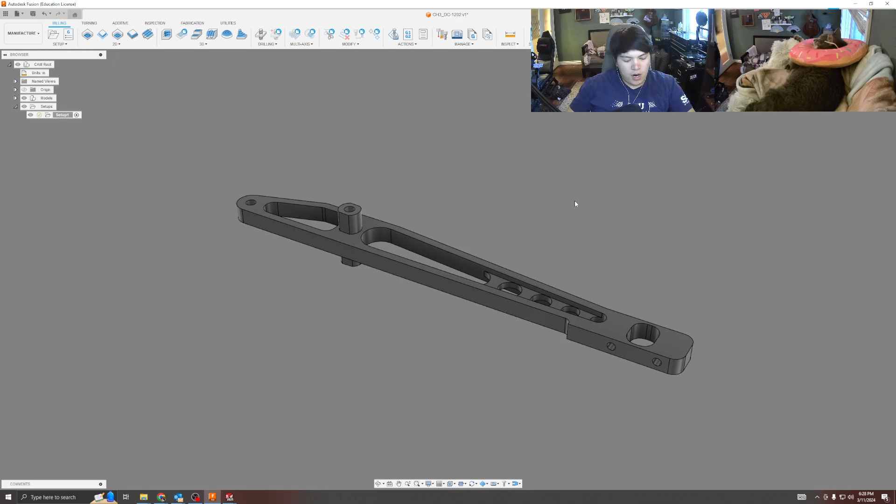Okie dokie. So this is the third part of the 6-part series. We're going to be introducing you to general operations and the tool table. So let's start off with the tool table.

You can see here that in the cloud, which is what you guys are gonna be using, somebody will set up the new tool table. By the time you're viewing this video, you probably won't be referring to this. You'll have the new Haas mill, and with the new Haas mill, we only have so many things that we can use. But luckily for you guys, there should be an updated table that somebody else already made. But generally speaking, this is the actual tool table itself for your parts.

So this will go ahead and list all the tools that you've used. So right now, I'm not actually using this tool, tool 11, 1/2-inch roughing end mill. I'm not using this tool. So say you have a bunch of tools that are populated, and maybe you did an operation and figured out, oh shoot, I actually don't really need to use that tool. It'll still show up here.

So in order to clean your tool table, you just click this little sweeper at the top, and you remove basically all the unused tools, and that'll just make it really nice and organized. So that way, whenever you reference this tool table, say you're making your tool list, you're prepping your tools for the mill, you have a nice clean tool table that you can reference.

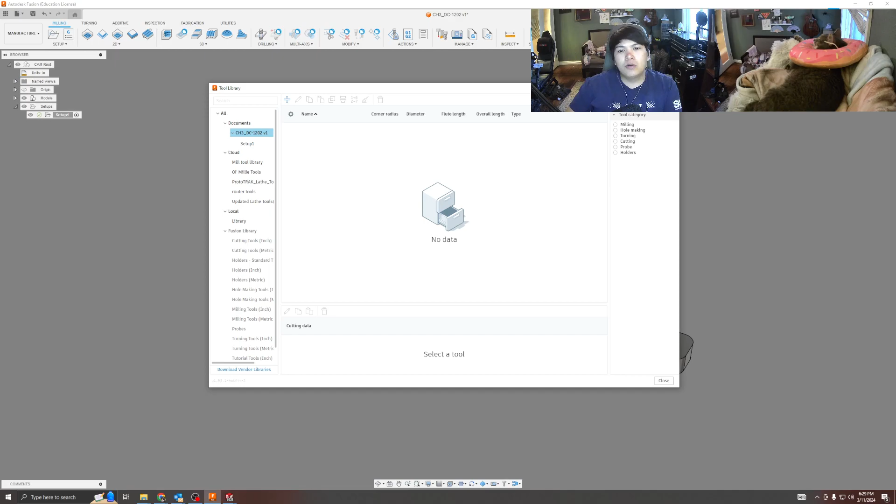Okay, so that's pretty much it for the tool table. I'm not gonna go into the organization of it and all that, but I will hit a couple of key points actually. So we have, generally speaking, our end mills. We have end mills and we have drills, and then we have a few specialty tools, like chamfer tool and engraver tool. You have face mills, like the fly cutter, the dodeca.

But within the end mills, we have a couple categories. So we got our flat end mills, both for finishing and roughing. Finishing is for taking off small layers, possibly even bigger layers if you don't have a roughing end mill. Your roughing end mill is what you're going to be using most of the time.

It basically has teeth, and that allows it to make partial tool engagement, allowing you to take a larger depth of cut when controlling it. And you control that with optimal load within adaptive clearing. I'll show you that in a little bit.

You have bullnose end mills. Bullnose end mills are really solid if you design a part and you need just tiny little fillets. It's basically a flat end mill with tiny little radiuses. Sometimes those radiuses are so small that if you look at the actual end mill itself, you might actually confuse it for a flat end mill. I've definitely done that, but generally speaking, if you do that, it's really no harm, no foul. If you have any sharp corners and you hit it with that, you're just reducing the stress concentrations that you have in your component.

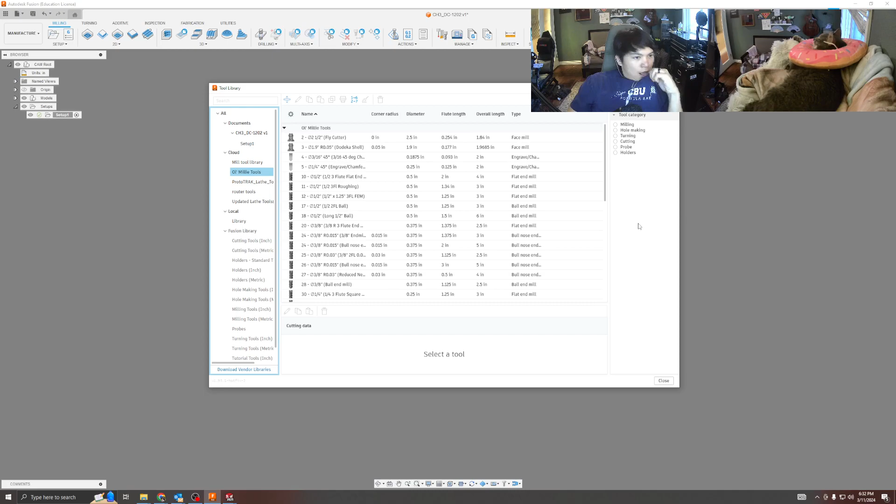Okay, I think that's it for tools. So let's go ahead and talk about operations. So there's a couple different sections. There's 2D and there's 3D. If you find yourself using some operations more than others, for instance, say I like to use this flat one a lot, which I never actually like to use, you can actually pin this to the toolbar to ensure that you have better access. But you know what? I don't really use flat that much.

I'm going to take that off the toolbar. Yeah. Okay. So you have 2D and 3D. You kind of know how to pin stuff up here, which is cool and really useful. But let's go ahead and talk about 2D versus 3D.

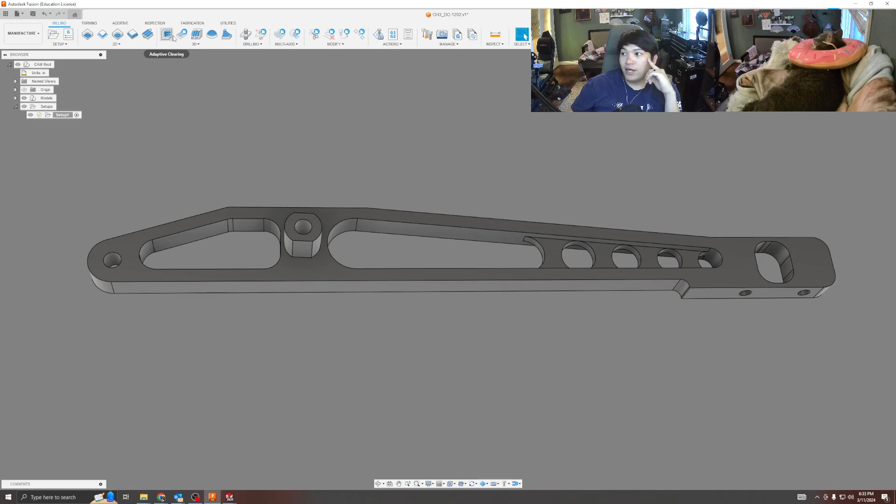2D you typically want to do if you want to control your end mill to a specific area, if you have sketches that you're using to define the area that you're machining, all that stuff. But I don't really use 2Ds that much anymore. Really, the bread and butter of what we do is adaptive clears. Adaptive clears are super useful. It does all the work for you.

And there's a couple constraints about it, but generally speaking, you just let it rip. You have to change a few parameters, but it's pretty automated, which is really nice. So breaking this down, 2D and 3D aside, and disregarding drilling, you have two primary tool paths, two operations, that you're going to be using: roughing passes and finishing passes.

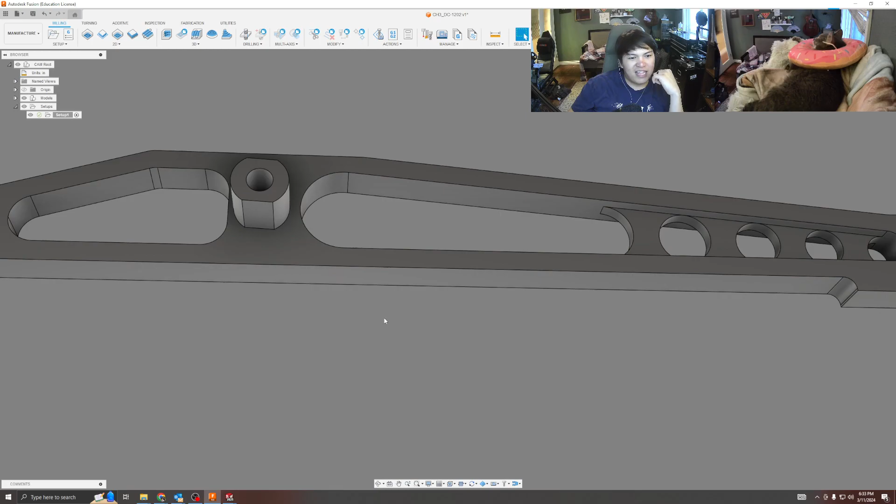So if you're new to machining, roughing passes are tool paths that go extremely fast. Extreme is a rough way to put it, but they're fast tool paths that remove as much material as possible. They leave a small layer of stock, and once we get the component down to almost net form, we come in with our finishing passes that go nice and slow and leave a beautiful surface finish. That way we have a nice looking part that is up to the spec we designed it for.

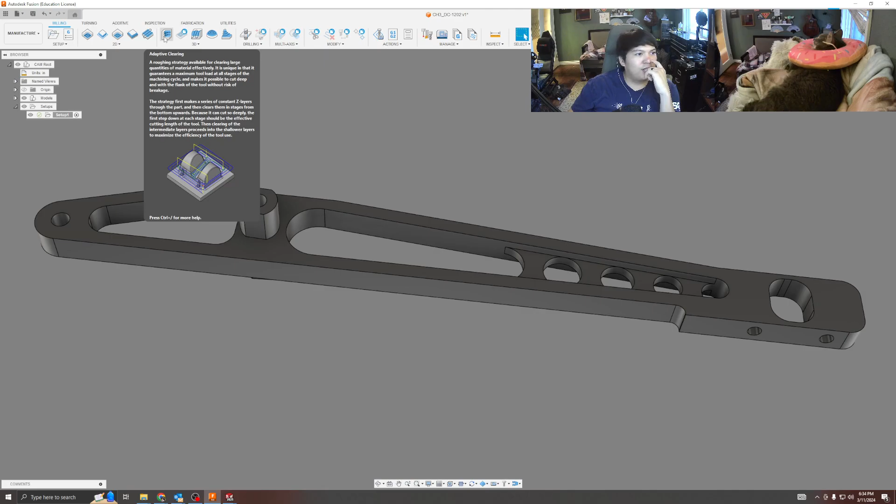Typically, roughing passes, actually really all roughing passes, you're going to be using adaptive clears. And then for finishing passes, we have two areas that we want to finish. We have finishing in the axial areas. When I say axial, I mean these flat faces. Looking at the origin, we're looking down at the part right here. You're probably going to be looking at the part like this when it's in the vise, from an ISO view.

But you have your axial finishes and your radial finishes. Radial is basically wherever the side of the tool touches, and axial is where the bottom of the tool touches. So whenever I refer to that, just remember that's what it means. So we have two different surface types. With our radial surfaces, we're going to be using contours typically, and for our axial surfaces, we're going to be using pocket.

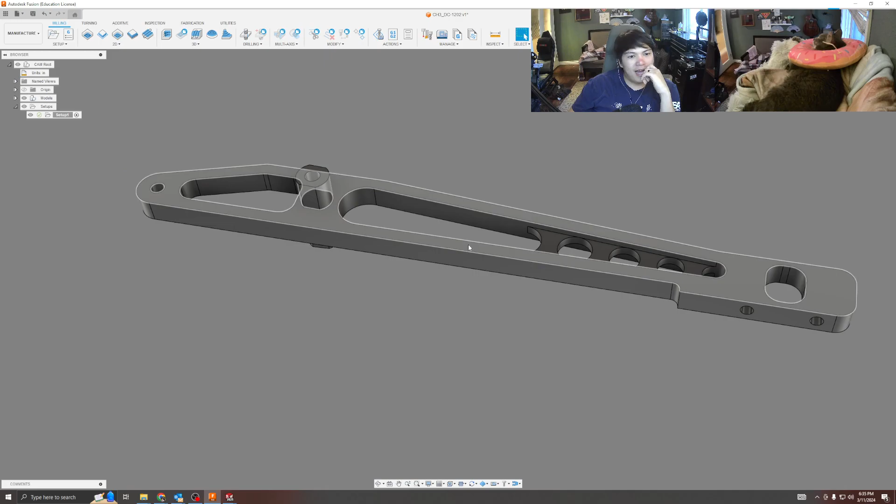Now the advantage of the roughing pass is of course that it's faster, but there are some concerns, especially when we're talking about the roughing end mill. So let's go ahead and do our first thing. We're going to use the 1/2" end mill. You guys will most likely have a new tool library. So we're going to click OK. And now something's going to come up, and I'm going to point that out to you right now.

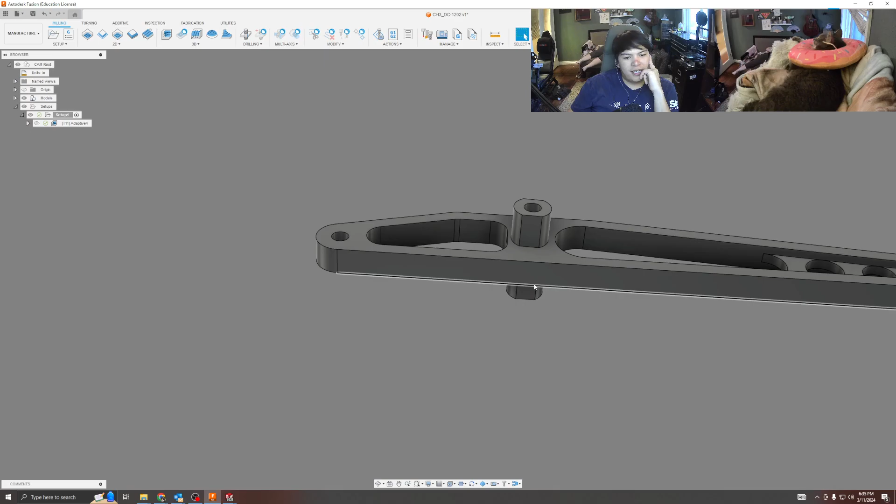What's happening in this adaptive clear is that it's going pretty much all the way to the bottom, finishing this all the way to here, which is fine sometimes. But here's the concern. This part is in the vise, and if we look at the setup, it's going to be clamped below this line. If we actually run that adaptive, it'll hit the vise itself, which is not good. That is no bueno.

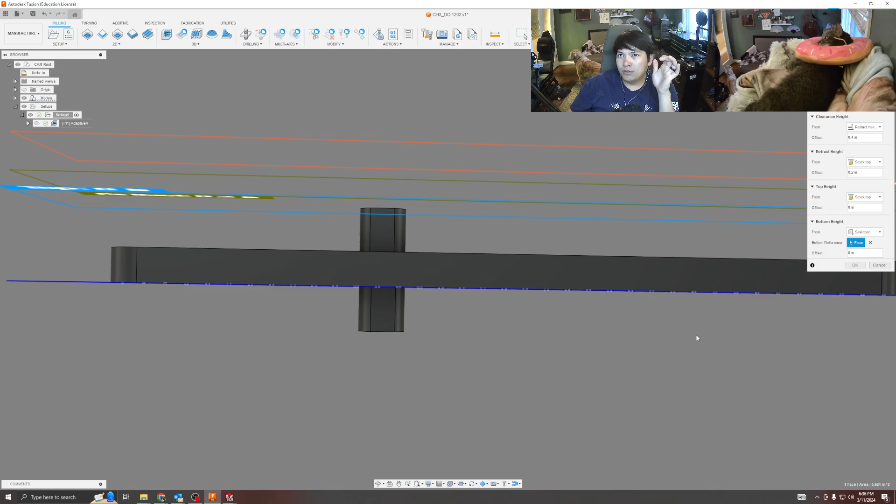So how we control where our adaptives go is we go to heights, and then we change our selection to here. If you're using the second to last parallels with the 6" vise that we have now, it's gripping about 250 thou. So generally speaking, I always want to make sure that I have about 300 thou of clearance. So if we simulate that, that's awesome, but there still is another problem.

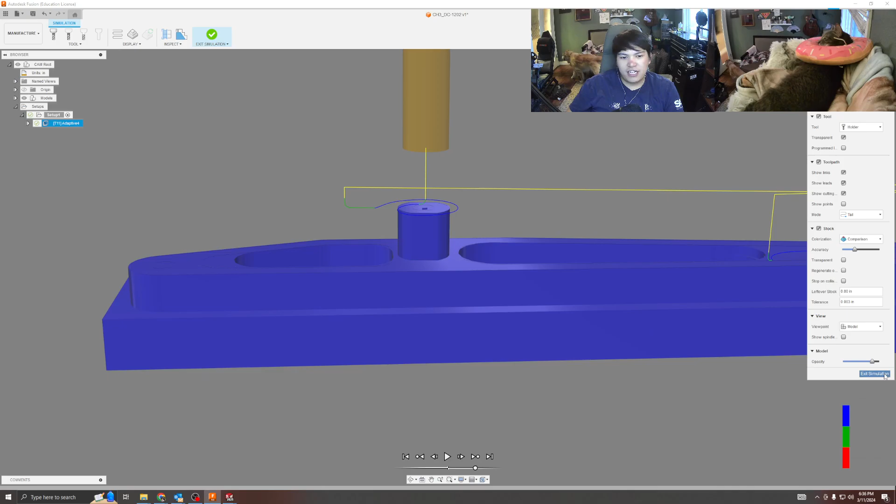Because I have stock to leave and I changed my bottom height to the very bottom of this part, it's not actually exposing it to this line. It's exposing it a little bit above it. If you go to passes under the adaptive settings, you see that I have an axial stock to leave of 5 thou. So there's a layer that's 5 thou above this bottom section.

So in order to fix that, I'm just going to come here and change this offset. Let's go 50 thou. That should be more than enough, especially if you measured your Z really accurately. A lot of the times you can't get your X and Y with calipers, but you can get your Z. We don't have ridiculously tall pieces of stock.

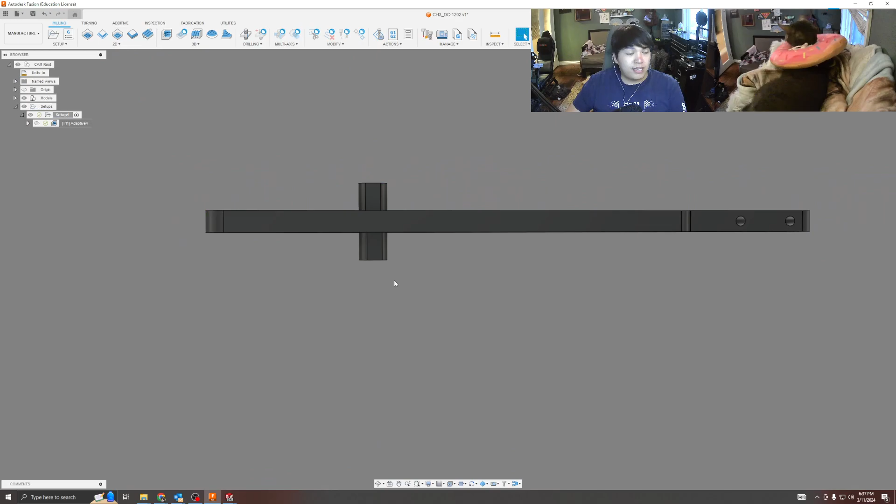Now that that's machined, a quick trick that I want to show you that I've been using for a long time is, in order to do a sanity check, and I know, obviously looking at this, I know that this is more than 250 thou of clearance, or sorry, 250 thou, which is the amount the vise is grabbing if you're using the second to last parallels, but I want at least 300 thou of clearance. So

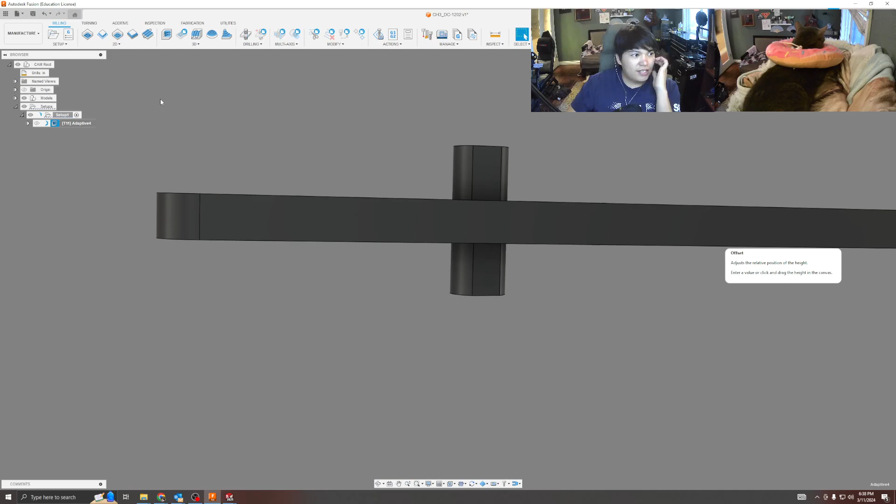A sanity check that you can do is be like, okay, well, I saw where that stopped, and in order to meet my minimum clearance requirements, I can actually change this to stock bottom, and then I could change this to 300 thou. And so this, I know for sure, will clear my vise as long as you measure your stock correctly in the Z. I know that this will clear my vise, and this is really useful to sanity check yourself if you have particularly a really short piece of stock in the Z direction.

But that's not really needed here, so I'm going to go back and change the heights to model bottom with an offset of -50 thou. Oops, not model bottom. I was capping, selection, that guy. Yeah, with an offset of -50 thou.

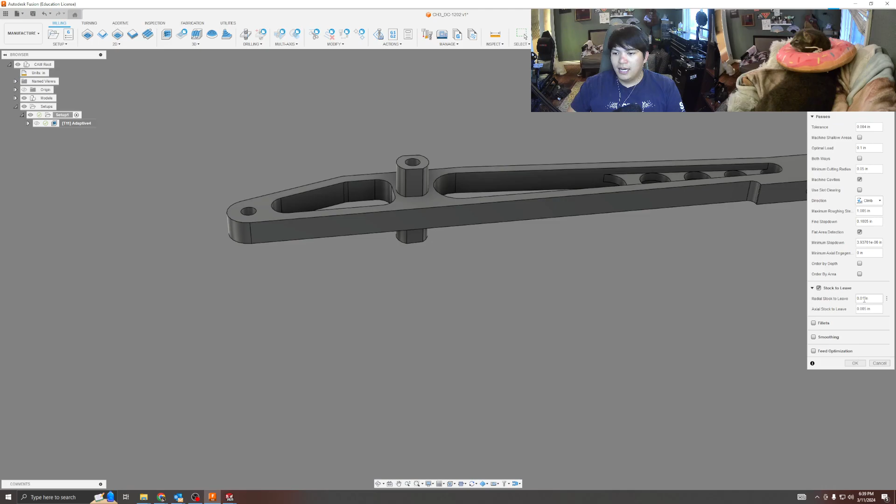Boom. Okay. So with the roughing end mill, this is super important, specifically with the roughing end mill, just because of the surface finish it leaves. For the radial stock to leave, and this might change if the roughing end mill is 1 inch in diameter, but this is what it is for now, you want about 10 thou, and then the axial stock to leave 5 thou. So we'll call it good.

The last thing to cover with the adaptive is your optimal load. Now, what makes the adaptive clear different from pretty much all the other stuff is that you actually have this parameter, optimal load. If you want, you can go ahead and pull it up yourself on Fusion. You could read what it does, but it really controls the amount of tool engagement that you have in the entirety of the tool path.

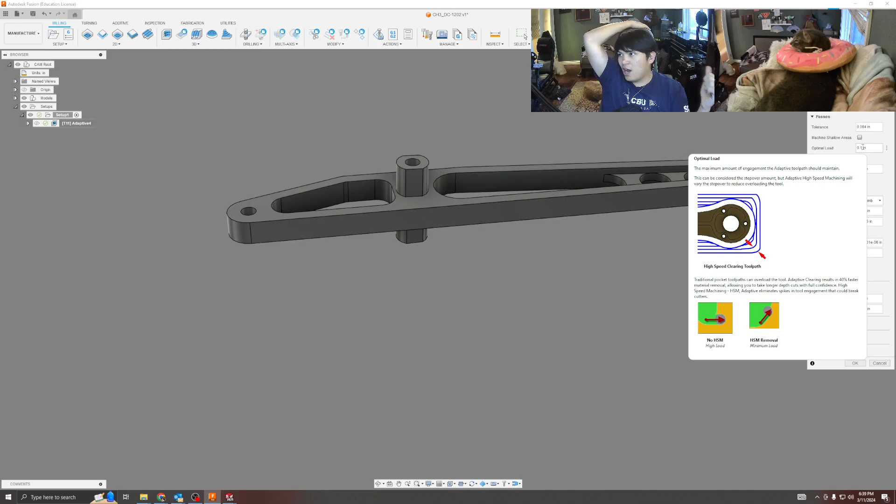Now there's kind of pseudo ways that you can do this with like contours or something by adjusting the stepover. But really, this is the most reliable way to control your tool engagement when you're hogging away a ton of material. So the advantage of the roughing end mill is that we can go up in optimal load.

A good practice to think about optimal load is you get the tool's diameter and you get 25% of that tool's diameter. For instance, say this was a 1/4 inch end mill. Okay, 1/4 inch end mill. 0.25, and then we get 25% of that, 0.25. That equals 0.0625. So we can change our optimal load to 0.0625.

And that's going to be generally kind of conservative. It's a pretty good middle ground for your optimal load. Not too little, not too much. And you don't want to be on the super conservative end when you're doing this stuff, because it will increase your machining time by a good margin. So that's the last thing to cover over adaptives.

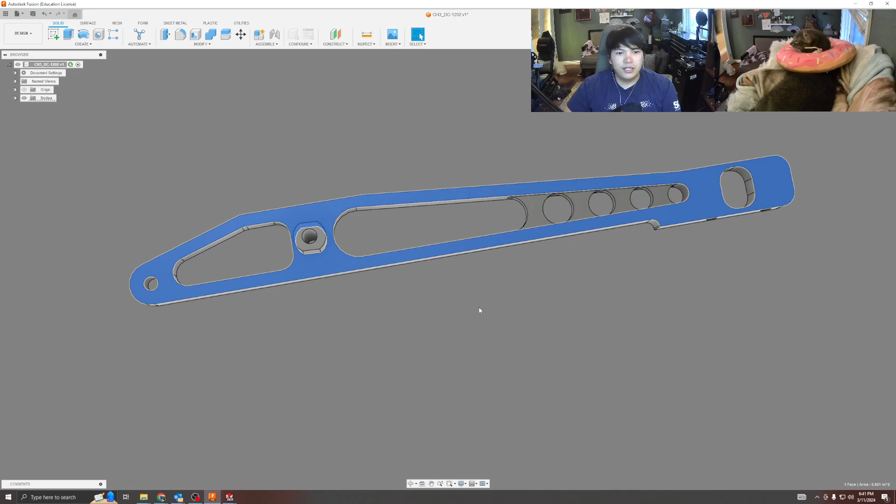Machining boundaries and stuff, you guys won't really need that until you get more advanced, depending on your part. And if there is a part, hopefully your lead can explain to you how to control machining boundaries. But I typically do it with sketches. You go to design, you do a sketch, and then you have a box. And then with that box, let's just pretend that I did a sketch. Actually, you know, I got it.

So let's go over to this guy. I think, yeah, this guy. So you'll notice that, let's look at this adaptive. Ooh, no, that's not a good example. Maybe this might not have been a good example. Yeah, I was capping. This ain't a good example. Whatever. Machining boundaries, good for making sure that you avoid the vise.

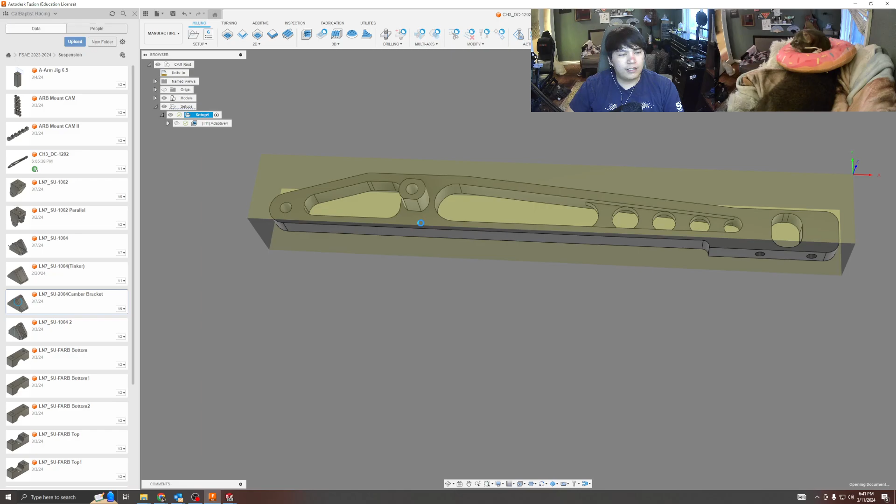Wait, let's, for the sake of time. Okay, cool. This one looks solid. Okay. So I'm gonna go ahead and simulate this. And now when looking at this part, oh shoot, this one might kind of suck too. Here, let's check this. Models, bodies. I'm just here to control my bodies.

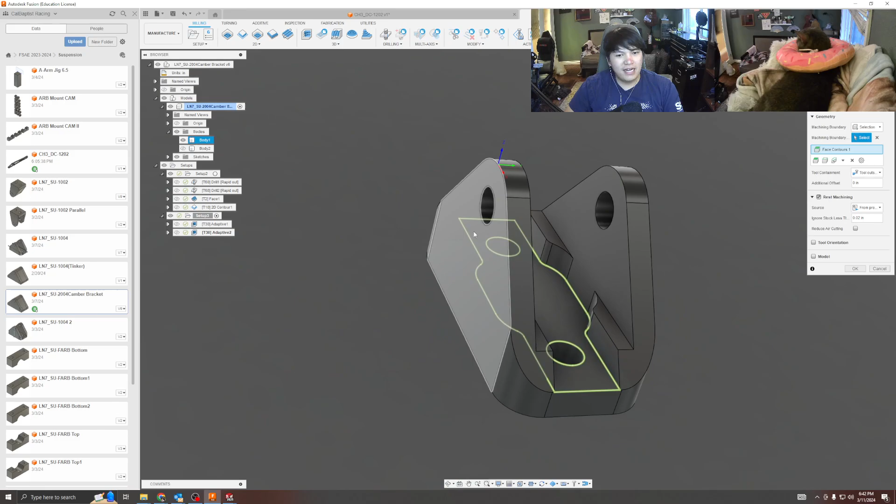Okay. Oh yeah. So here I have this machining boundary selected because this part is getting gripped by the vise from the outside, and I don't want it to exceed this area itself. If it exceeds this, it's going to hit into the vise. So I'm just controlling the actual adaptive itself in order to ensure that we're meeting all of our clearance requirements when it's clamped to the vise. That probably wasn't a very good explanation, but oh well, you'll figure it out. Okay, let's go into our finishing passes.

Pockets. The cool thing about the roughing end mill is even though the radial portion of the roughing end mill is rough, the axial portion isn't. So that way we don't actually have to waste time doing a tool swap. With the Haas, it'll be automatic, but for our machine right now, it does take a bit of time to actually swap tools. It has to go back up to its home position. You have to take out the tool. You have to manually put in a new one, and it has to go all the way back down to start machining again. So axial faces.

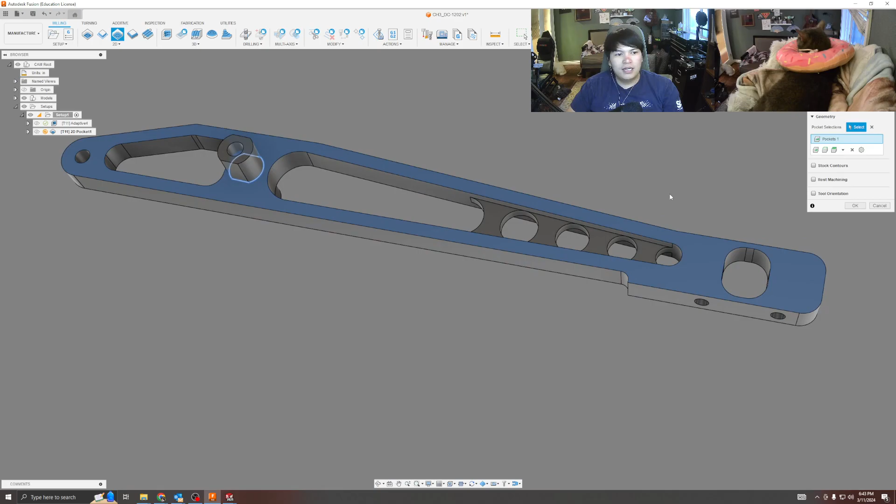This is a 2D, so you actually do have to make selections, whereas with the 3D adaptive, you basically change the parameters, you click OK, and it'll do it. With 2D stuff, you have to actually select areas. So let's go ahead and do our finishing passes, and let's see how that does. I'm going to select all the axial regions. It probably won't be able to get every single region. Yeah, so we're getting an error here, and that's totally fine. So it's just going to go through and it's going to clear all this stuff.

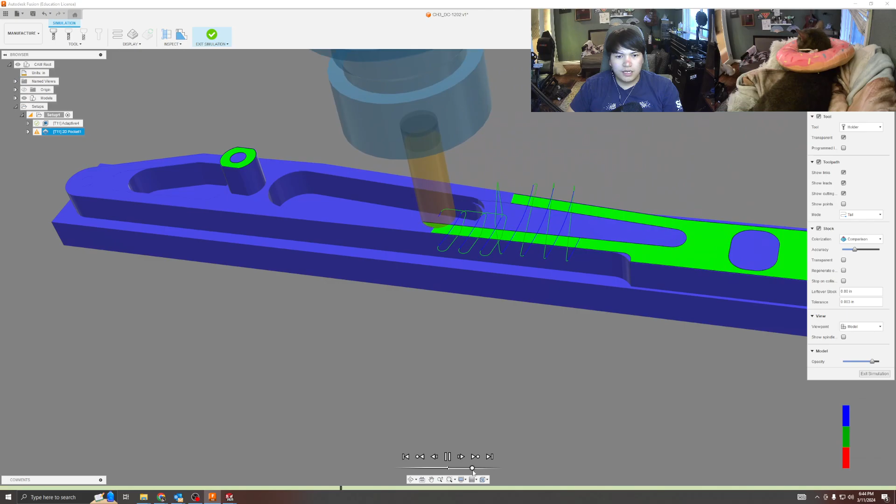And you'll notice here that this area isn't actually clear. There's still stuff that we have to clear. So that's not good. What we just did right here, it actually did a clearing with a pocket, and we're not able to control tool engagement so much with a pocket. So it might come in too fast and take away too much material at a time. And that is not good. But for the sake of time, we'll go ahead and just continue on.

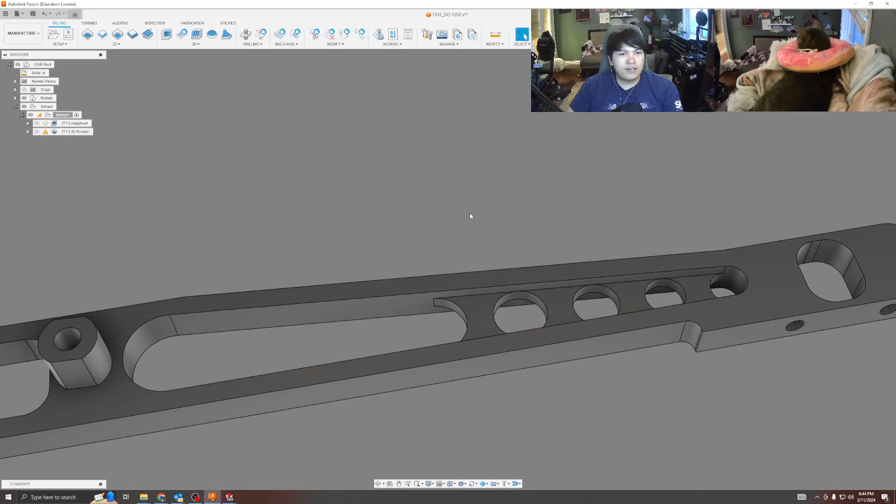Just a quick note, for this, we're not going to be able to use the roughing end mill, unfortunately. So what we actually have to do is another adaptive, but we need to use a smaller tool size because the 1/2 inch end mill isn't able to get into this tight space. Let's see what the distance is between this. So that's 0.352, the distance between these 2 points. So the half inch end mill can't even fit in between this space. So we definitely have to step down our tool size to a smaller flat end mill to ensure that we're doing that correctly and using the adaptives properly.

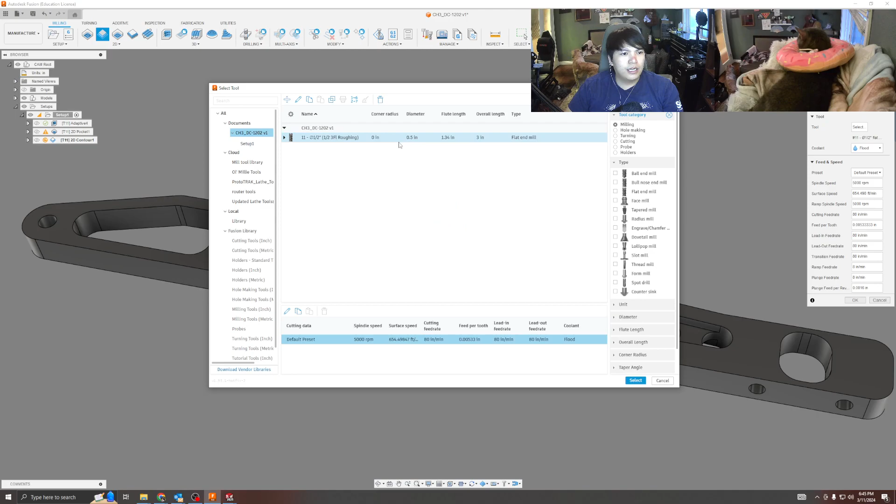Okay, so last part that I want to cover. I know this is a pretty long section. I'm trying to move fast. Contours. Contours are radial finishing passes. Cool. So what we're gonna do is go and select. This is the roughing end mill. I don't want that. I'm gonna step down my tool size. Let's do it at 3/8. And this isn't gonna apply to everything because I designed this kind of badly, unfortunately, and I probably won't be able to hit everything with a 3/8. But we're gonna select OK.

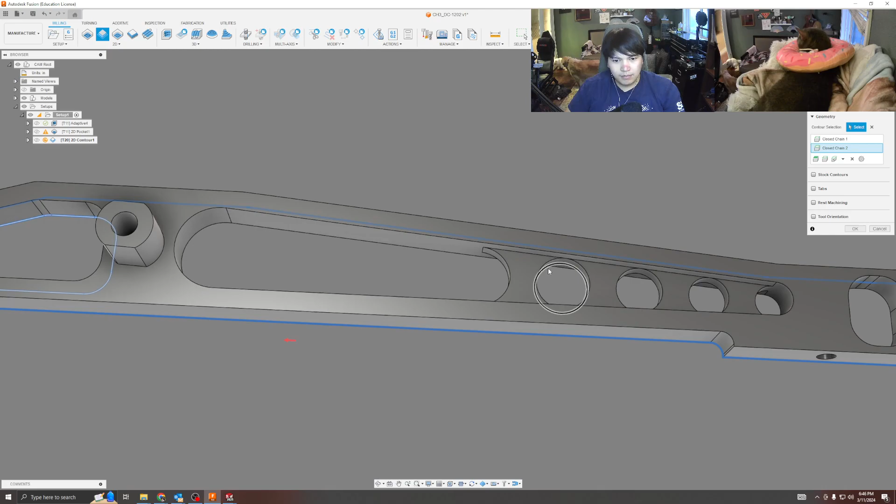And now, because this is a 2D, again, we have to select our geometry. So I'm gonna select this geometry. I'm gonna select as much as I can. This geometry. Oof, not good. So yeah, that's obviously not going to work because if we do this pass, it'll basically take out this entire middle section. So no bueno. Let's delete that one. Boom, boom, boom. And like I said, this won't be able to hit everything. We're gonna have to control a lot of this with sketches, which is fine. But let's go ahead and show you guys what it does.

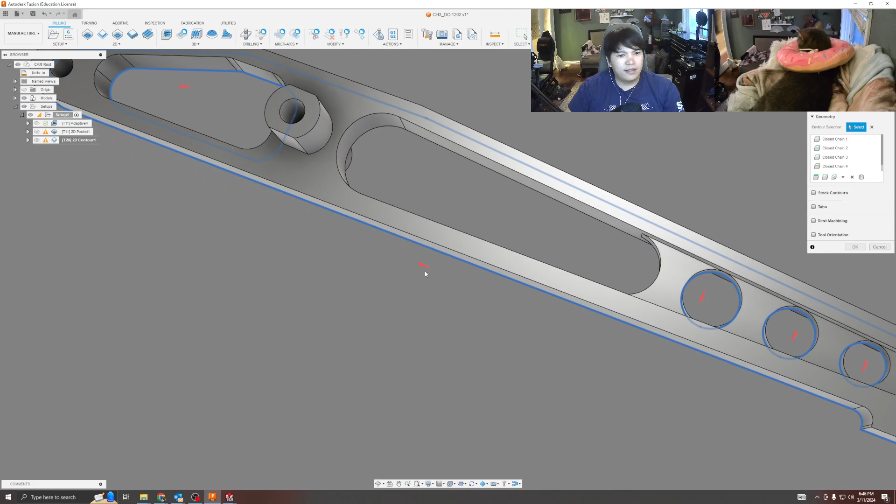Oh yeah, and another thing to note is that when looking at the geometry, you can control the side by clicking this little arrow here. Ah, bollocks. Okay, oh, got it. Okay, yeah, so you can actually change which side the tool is running on. Super important, especially when you're chamfering, to pay attention to that stuff. You don't want to be hogging out huge portions of your stuff. Let's just go ahead and do that and show you what it does. Oh, no, Fusion is smart enough to basically say, nah, I ain't gonna do that because I'm gonna destroy your part.

But in terms of roughing and finishing passes, that's the basics.

I'm going to go ahead and do the rest. I'm going to do some machining off camera, and I'll come back to you guys and show you the rest of it.

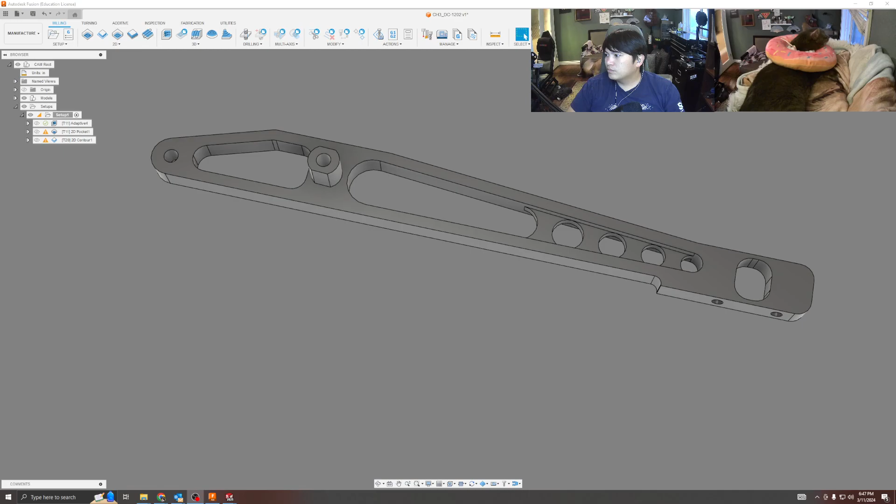Before I actually move on, I'm going to show you something I really wanted to point out. So when doing this contour, let's go back to the 3/8. When we select our geometry, it selected this entire portion, which I don't want.

Let's see what it does. So it'll actually go through and murder all of your part. So you see your part is destroyed.

Unfortunate. Now how we control that, as I previously mentioned, is sketches. Sketches are OP, they need to nerf them. So let's go ahead and start a sketch on this face.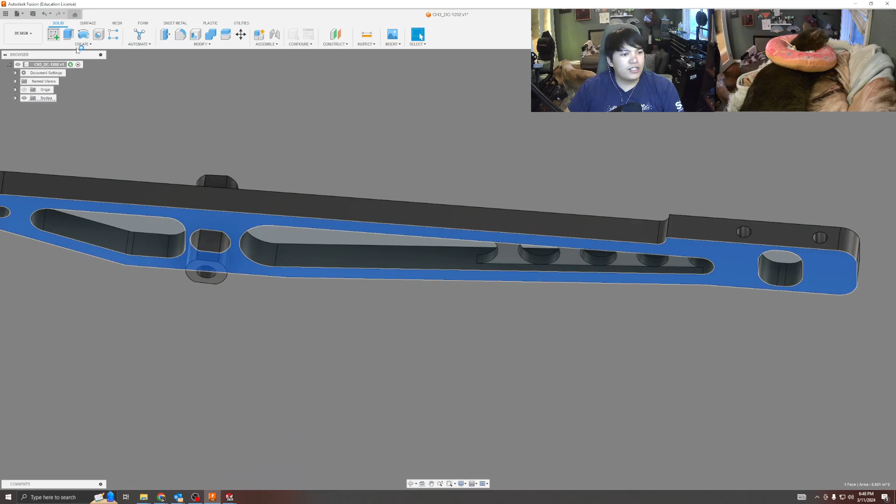There's some things that Fusion does better, and some things that SolidWorks does better. You'll notice that it can be wonky.

Convert entities, so project entities, is the equivalent of convert entities. They work a little bit differently in Fusion. They could be a bit wonky at times, but we're gonna go ahead and select that.

Select that, we're gonna click OK, and let's go ahead and create a line and select these two points. Connect it all together, and now we have a nice sketch that we can use to define the toolpath of the contour. So, contour.

And then we're going to select our geometry. We have this geometry that destroyed our part. And now you'll notice, like I said before, you gotta pay attention to this guy.

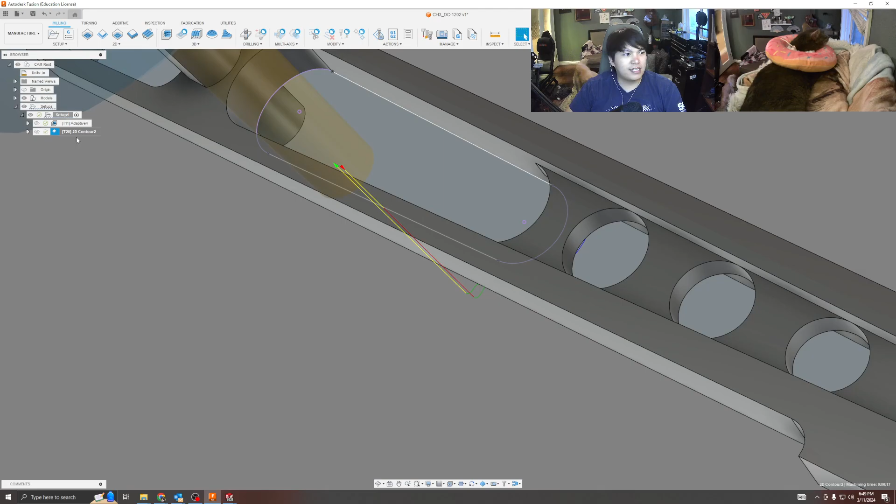Let's see what happens when it does this. Let's see if it'll even let us do it. Yeah, it does. Cool. So you'll notice that when I come down, boom, it just murders your part. That is not good, you don't want that.

So we're going to go ahead and select the opposing direction. So now let's go ahead and replay that. Cool, but not cool at the same time.

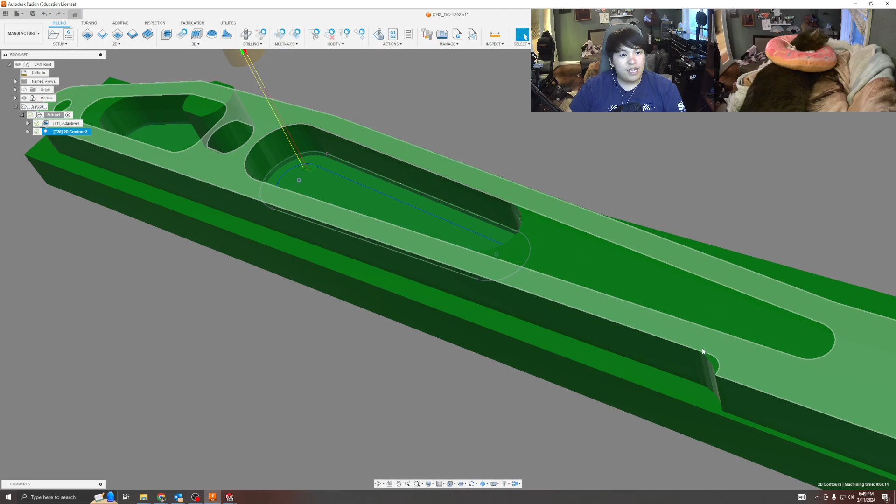So the reason I say not cool is because what's actually happening when we're doing this is the very bottom of the tool is actually contacting -- oh, actually, nah, we good, okay cool. When you're doing your contours and stuff, typically you don't want it to contact.

Sometimes it's unavoidable. Say we change this up a bit. Sometimes it's unavoidable in situations like this, where if I select the geometry and select this guy, the axial face of the tool is going to be making contact, which is fine. It's not a big deal, no harm no foul.

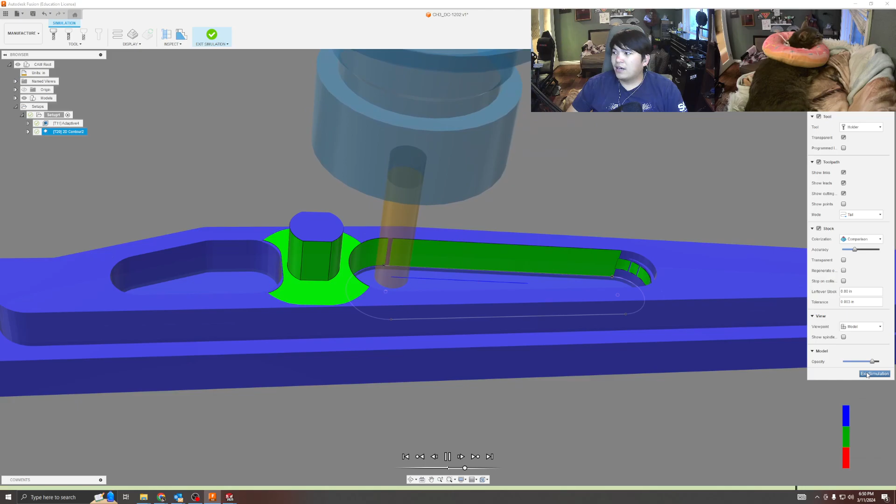Okay, that's all I wanted to show you for that. I'm going to do some machining off camera, and then I'll come back and show you more of what's happening.

Okay, so another thing I wanted to point out. I actually came in here with Tool 30, and I'm doing another adaptive clear. And the thing is, because this is a finishing end mill, I have less stock to leave.

Now what does that mean? That means if I do a 3D adaptive clear, I have my 5 thou stock to leave. For finishing end mills, I use 5 thou for my stock to leave. It's not as rough as obviously the roughing end mill, so I can have a smaller surface on that radial end.

So what that means is when I generate this toolpath, it'll want to remachine everything, because it's going to try to get everything down to that 5 thou stock to leave, which I don't want. It's going to be a lot of unnecessary time for something I could just do with a finishing pass.

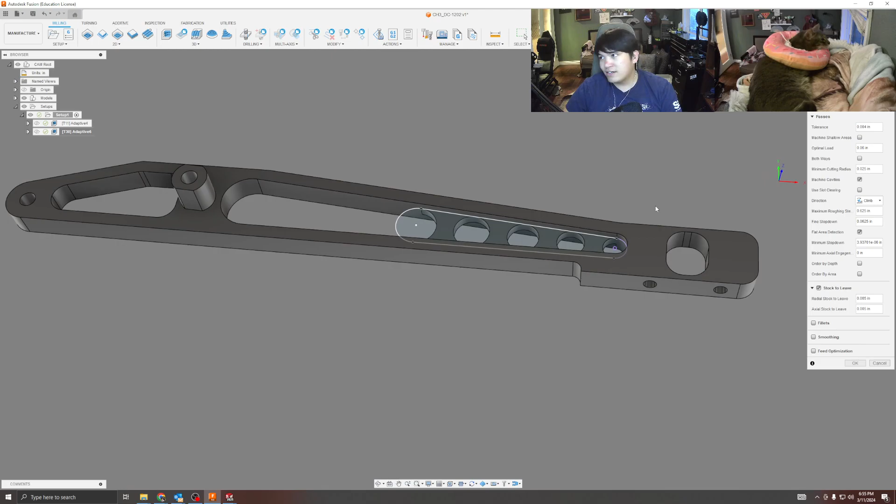So what I did was I actually created a sketch, and in that sketch, I just went here to geometry, went to selection, and selected that sketch. And now, because I'm not really worried about my vise so much, it just says tool outside boundary.

What that means is, and no, it doesn't mean what you think it means. It's not, oh yeah, tool machine everything but this inner circle. No, it means the radial end of the tool will basically go no further than -- it'll always at the farthest still be touching this boundary, which is kind of weird.

I think it should machine everything but that. You can just do the exact opposite, tool inside boundary, which does mean it won't exceed this boundary at all. So yeah, click OK.

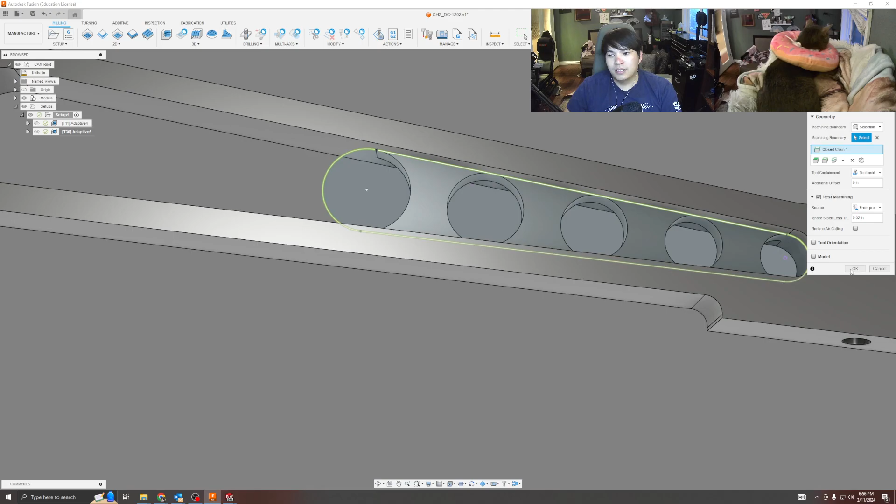And I'm just going through and clearing all of this, just because the 1/2 inch end mill isn't small enough to actually get into all those grooves.

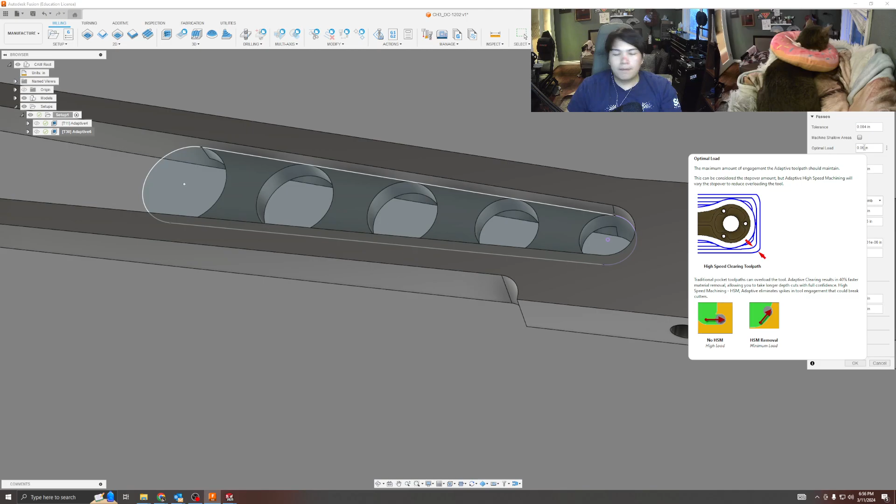You'll notice that with my adaptive clear, my optimal load, it's using that parameter I talked about earlier. 25% of a 1/4 inch tool is 0.06, and I believe that is it for this.

So I'm just continuing to do my adaptive clears to remove as much material as possible, as quickly as possible. One thing I wanted to point out: looking at this adaptive, you'll notice that it starts ramping really, really high above the part. You don't really want that. That's wasting a ton of time, and machining time is very precious. You don't want to be there forever.

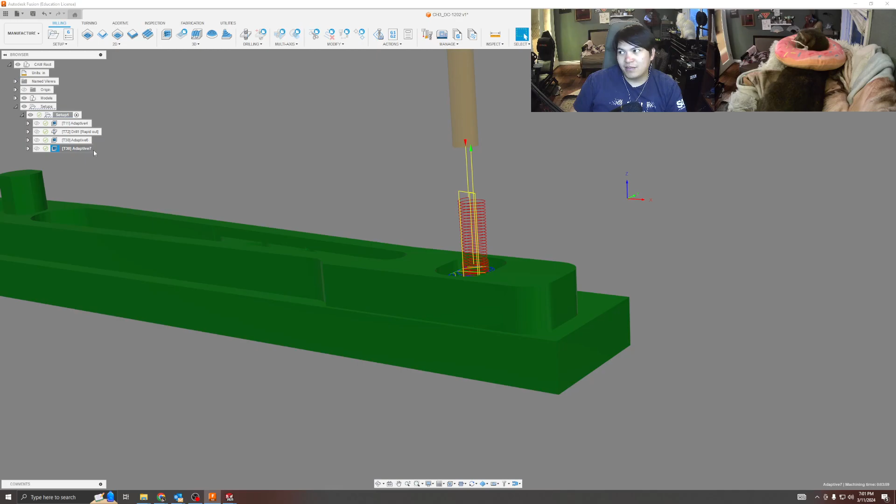So like previously stated, the way you control where your adaptive goes is through the use of the heights tab, as well as machining boundaries. So all we're going to do is go to heights, and change that stock height to our selection. Sorry, our top height to selection. I'm just going to select that face, and that will ensure that the ramping doesn't go all the way down.

Another thing I just saw now is that it's going all the way to the bottom of the model. We don't want that. Again, I'm going to go here, and like per usual, I'm just going to go below -5 thou. Alrighty.

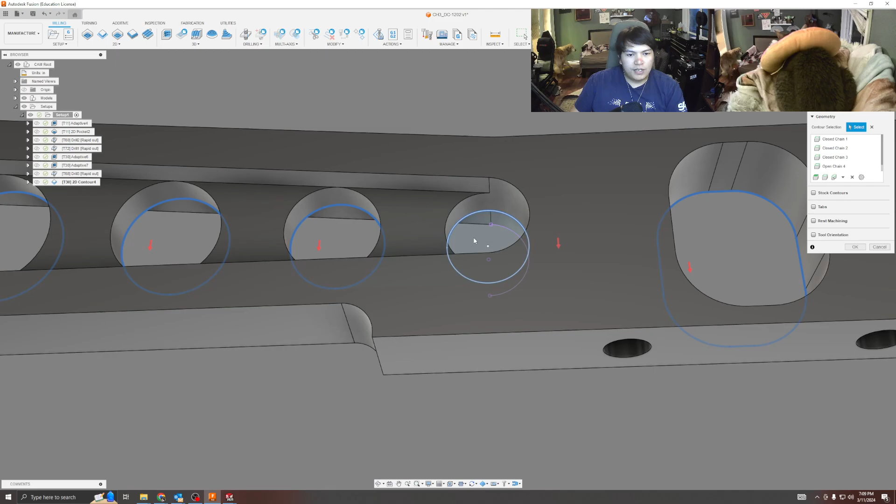I am back again. Another thing I wanted to point out: here I have an actual radius that's broken up into two different sections, so I just defined it with a sketch. But here I've run into a problem. Right now, my contour is actually going to be cutting into my part, and I can't select it. Oh, crap. Let's delete that.

I can't select it, so one trick to do in order to select it is you just go and hide models. That's at the left here, there's a little eyeball icon. Hide it, switch that to the inside, show your model back, and you're good.

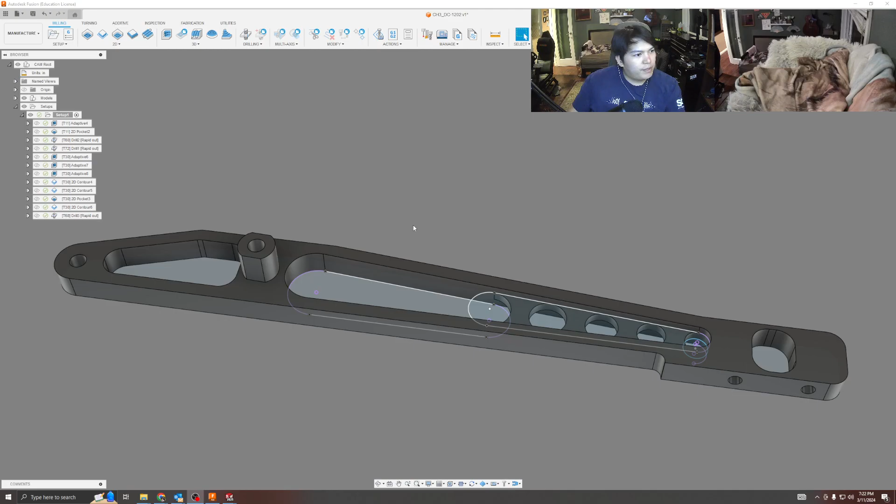Alrighty, ladies and gentlemen, so I have this first side complete. Let's go through all the CAM.

So we first initially have our adaptive clear. This is our most extensive operation in terms of the length of it. This one, the adaptive is about 10 minutes, 10 to 12 minutes, something like that. These little boogies are just from the accuracy on here, so in reality it's not actually like that. It's just that our CAM accuracy is down just so it plays nice and fast.

While we still have this tool loaded, remember that we can do axial finishing passes with the roughing end mill. It's totally fine. And something notable is that if you look at the left side, you'll notice that all my same tools are grouped together. You might not always be able to do this, but it's really nice because you can ensure that you're not changing tools super often. You want to order them as efficiently as possible to reduce machining time.

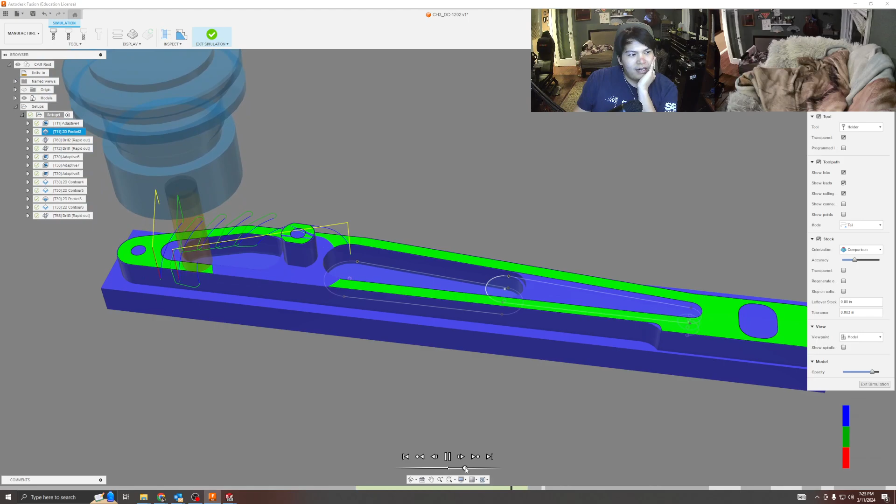So let's keep going with that. So after this operation, that's all of the stuff for tool 11.

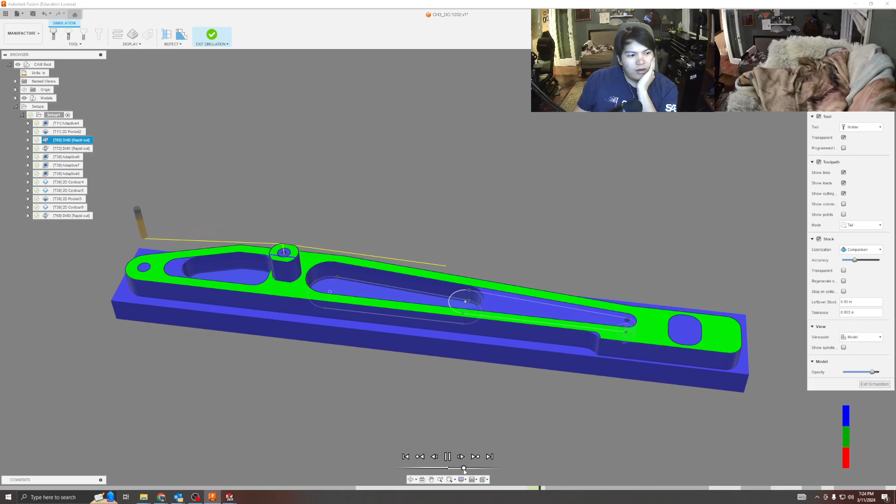Okay, now I'm going to go through and do some spot drilling in all the spots that I see fit. So this spot's interesting, I'll show you guys why in a second. Oh shoot, okay, we're going to spot drill that. Spot drilling is just there to, I don't always do it, but it's good to prevent the actual drill from walking.

And then I come in here with this drill. The reason I'm coming in here with this drill is because I don't really have any end mills that are small enough to actually get down in there.

When you change the optimal load, sometimes when you reduce the optimal load, it doesn't actually allow you to ramp down into a tiny pocket like that. So now I just drilled that out so that way I can come back and clean that later with this next end mill that I have. So I'll come in with the 1/4 inch end mill, and now we're just doing another adaptive clear.

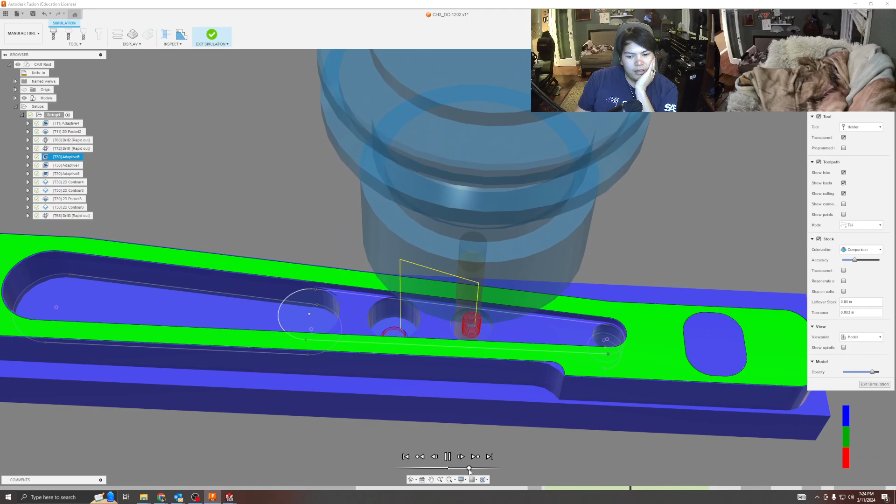Boom, it's gonna keep going, it's gonna get all this good stuff. This is another pretty long one. Go through and just take away all that material. And then there should be—oh, it's still going. Still going, still the same one.

And then we'll come over here to this other adaptive, go all the way. Something notable is when I'm doing these adaptive clears, I'm actually going just below the bottom of the part, because the intention is that I'm going to origin off of this circle when I do the part flip.

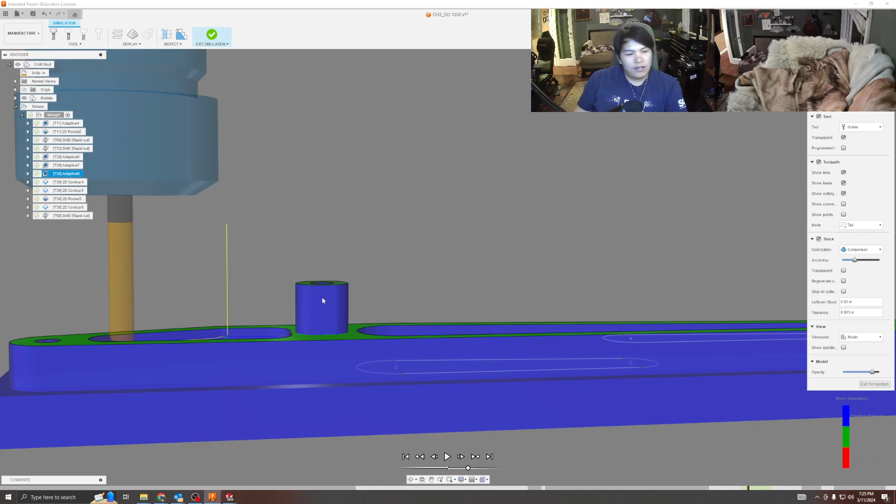So we're just continuing to clear. This is something I may have to consider when I machine this in a few days. Looking at the height of this tool, this is a 1/4 inch tool. I'm not sure if we have any 1/4 inch tools in this length, so I might have to change this to like a 3/8 when I come down in here, to make sure the tool holder itself isn't smashing into this little nub. Yeah, let's keep going.

So, yep, just an adaptive pass. Now we're going through and touching up everything, doing our final finishing passes, our radial finishing passes, and our axial finishing passes.

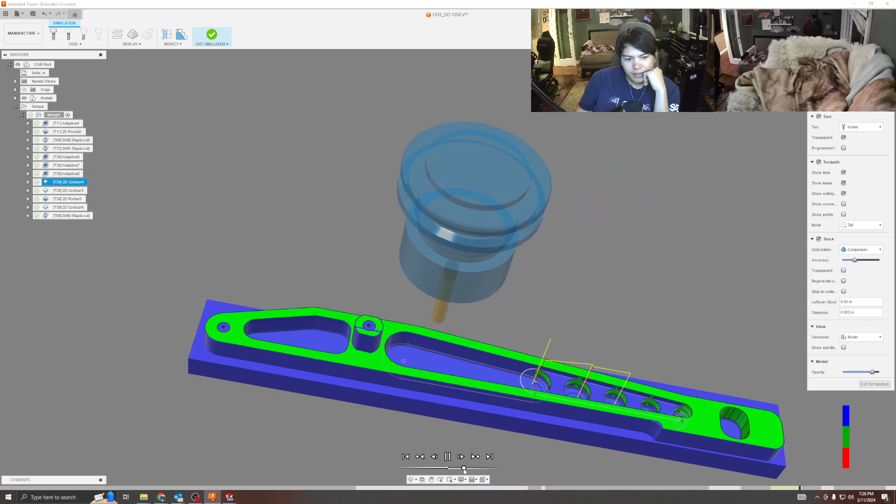Keep going, this is another spot that gets really close. Or actually, no, not yet. It was capped. Okay, finishing pass there. Not there yet. This contour you just saw is actually one I defined using a sketch. Remember, sketches are powerful. Yeah, let's keep going.

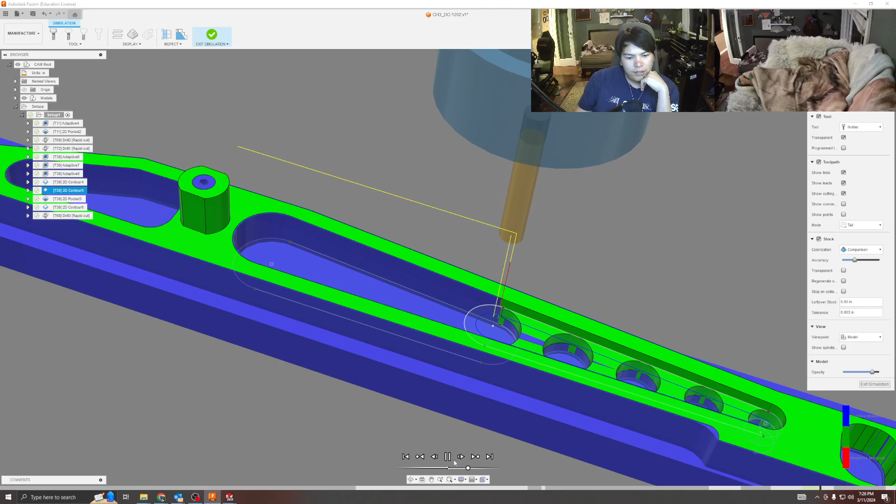A pocket on that thing. So yeah, this is what I was talking about. Depending on my tool setup, I really need to pay attention to the actual tool length, because if we don't have a very long 1/4 inch flat end mill, it might actually hit that nub.

Continue. Another contour defined by sketch, you guys saw that one a few minutes ago. And then this guy does the outer portion first. Gucci. And you'll notice, ooh, this is interesting.

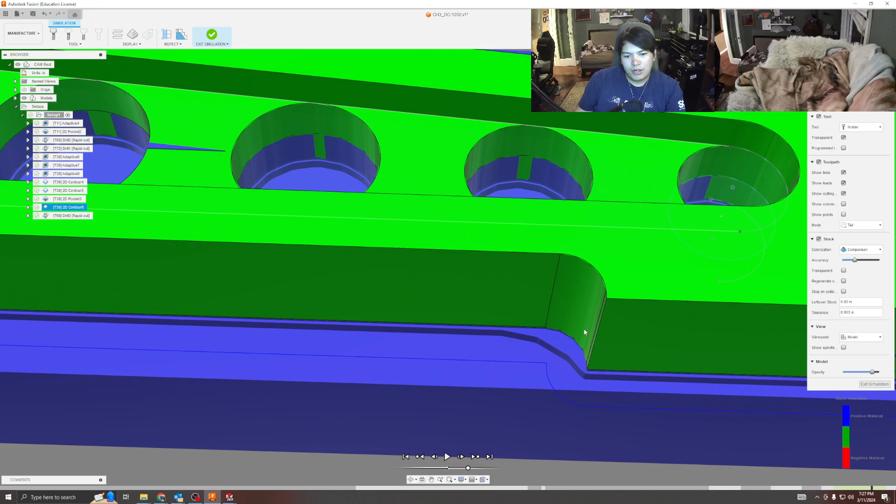Very interesting that I caught this, but you'll notice this looks a little weird. So what just happened is that tool, and I don't want to replay it because the simulations can wig out sometimes, but when we roughed with the 1/2 inch, it wasn't able to get nice and deep into this fillet. So when we came with the contour, we're going to engage a ton of that tool, which has the potential to break the tool. I just need to relook at it, do the math in my head, and see if that's actually good moving forward. If it is, I'll keep it that way.

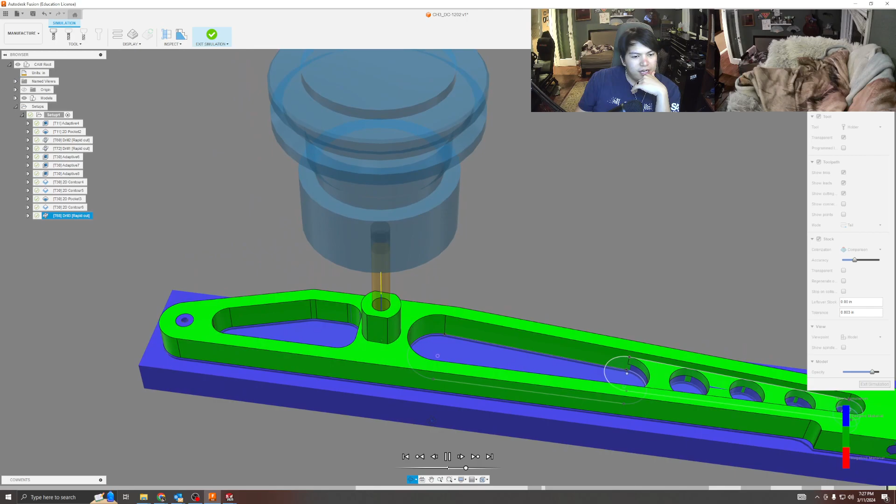And then we have a nice contour, and then our drilling. Now, some considerations: make sure you're not running the same RPM as you are on the end mills. You want to be at like 500 or so RPM, depending on the tool. Look at a speeds and feeds table. Run those drills pretty slow compared to the end mill.

And I will go ahead and create a new setup, and I'm going to do some milling off camera, and I'll be back here in a sec. I know this video is getting pretty long. I know it's rough, but whatever.

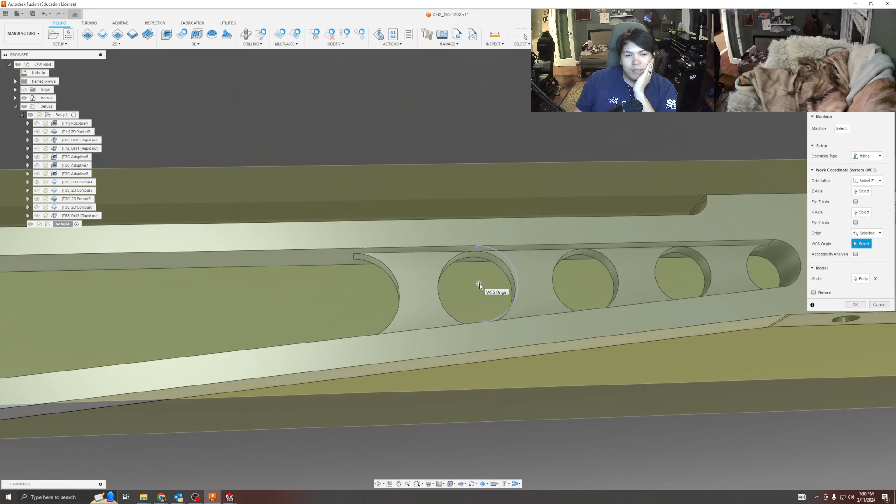Okay, just wanted to touch up on creating your own origin. I'm going to go ahead and origin off of this circle. I don't normally have a point to do that by selecting a point, but I actually used a sketch. I did a project entities on this guy and then put a point in the center of that, and that allows me to select it.

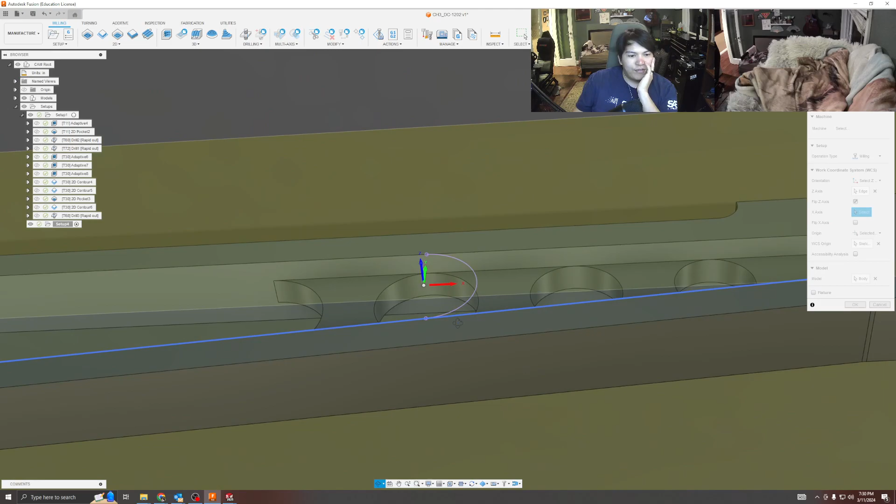And just like before, we could select our Z-axis. Our X-axis is good, we'll flip X, we'll flip Z, oops no, flip X again. Okay, and that is what I am talking about. So now we can origin off of that circle. You'll note that because we flipped this part, we still have material. Oh, shikaz.

Huh. You know, I'll come back to you guys in a sec, I'm going to change some stuff.

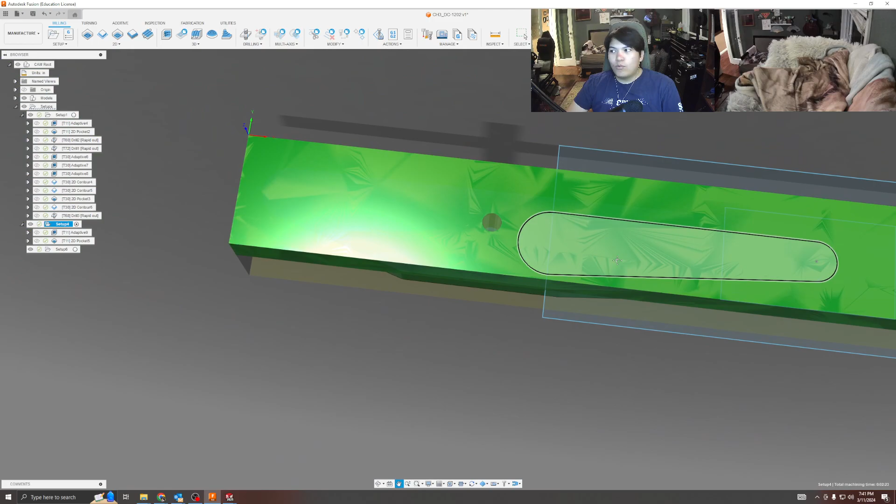Okie dokie, I am back. Now I did some interesting stuff. You might be thinking, if you know what you're doing, why don't you just take the origin off of this hole right here to get the most accurate result? This is a 1/4 inch hole. Feeding the edge finder down into that is fine, I've done it before, but it can wig out on really tight radiuses. So I generally like to go with the bigger hole, like 3/8 and up is pretty solid.

But that being the case, let's go and see what I did. So I have this basically set up in 2 setups. Using sketches, I did an origin on the top left, and I'm going to go ahead and simulate that.

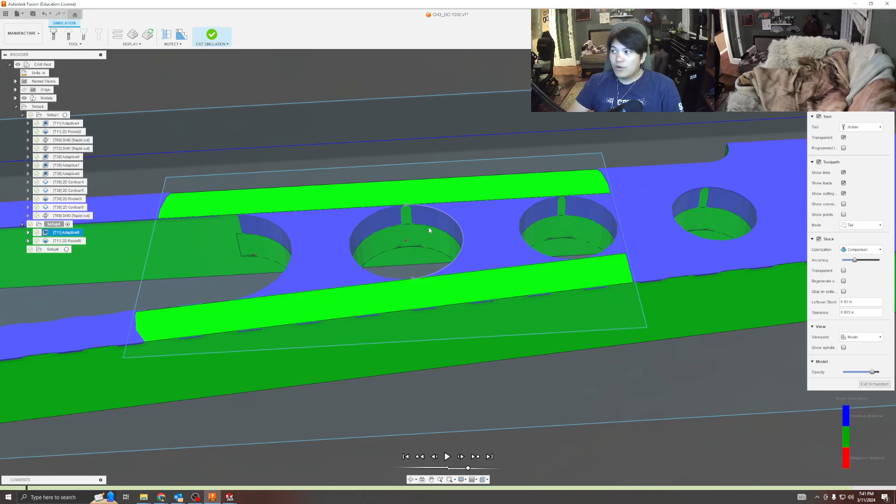So I use sketches to define my machining boundaries. Did an adaptive, and I did a pocket. So cool, that's all that happens in this operation. And what it does is it exposes this hole as well. It gives me the correct surface, because of course these still have stock to leave, the correct surface to actually Haimer off of in terms of my Z. So you get your X and Y from this hole, and then the Z from basically any of this surface, this surface, this surface. That's all fine.

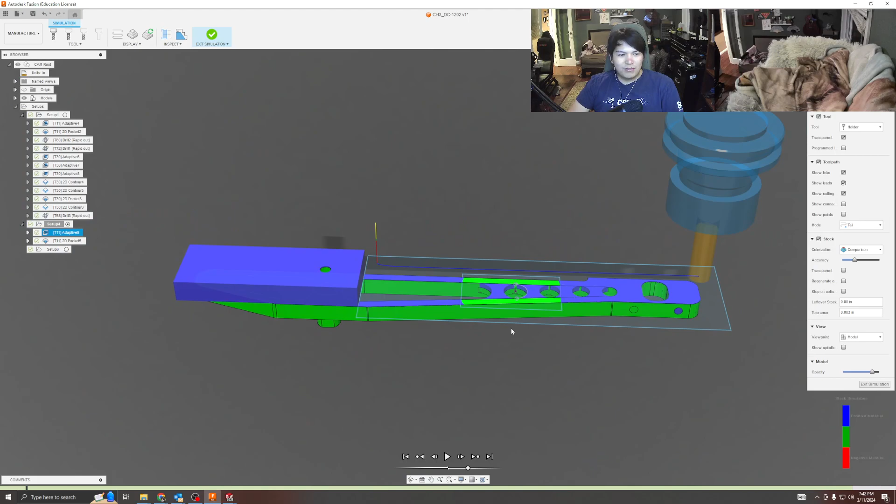The interesting thing about this is that because it's doing a finishing pass in its own way, not within a singular operation, it's doing a pocket here. Everything else is gonna look uniform except this one spot. This will have a different machining path, which will be interesting to see. Doesn't really affect the part, it'll just look a little different. If you don't like it, you can hit it with some Scotch-Brite and get out those machine marks. But machine marks kind of have a drip factor in their own sense.

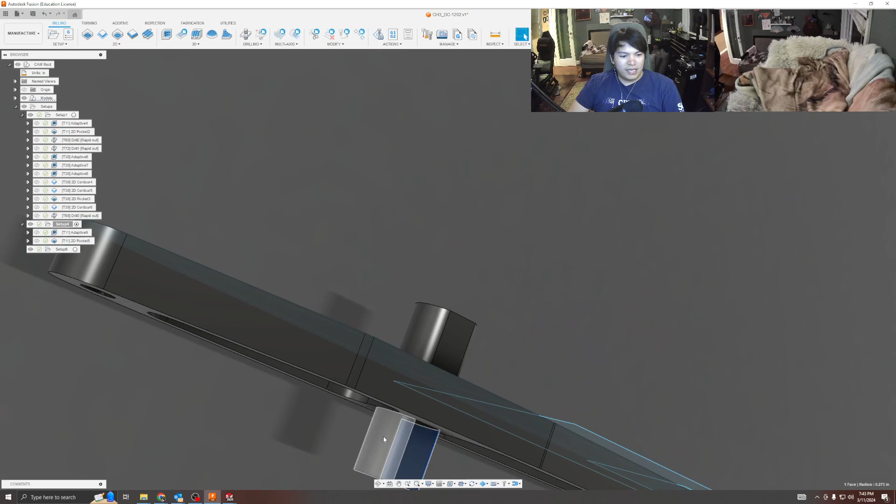And just to clarify, you might notice, why didn't you just do the whole thing? Well, the most important thing about this is I need this to be concentric with this. If I'm just origining off the corner of a stock, measuring the stock, a lot of times you're measuring it with a ruler. We don't have any 12-inch calipers or anything. So if I machine, this is going to be offset from this. And that is the only important tolerance that I care about in this entire piece. So that's just stuff to keep in mind.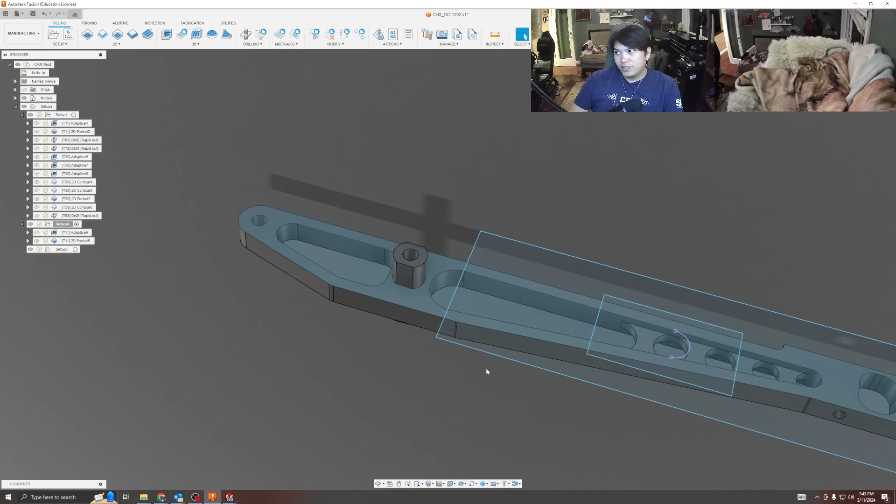And a lot of this stuff you're probably going to have to learn in blood, honestly. You might look at this stuff and be like, why don't I just do this? I could take shortcuts here and there. And it's fine, you can do it. Your tolerances won't be the best. Just machine on your own, not on your own of course, with supervision. Machine and see what goes wrong. There's a lot of attention to detail stuff you really got to notice before you start getting really tight tolerance parts that come out perfect every time. It's these little lessons you have to learn along the way that you're not going to pick up every single one from this video.

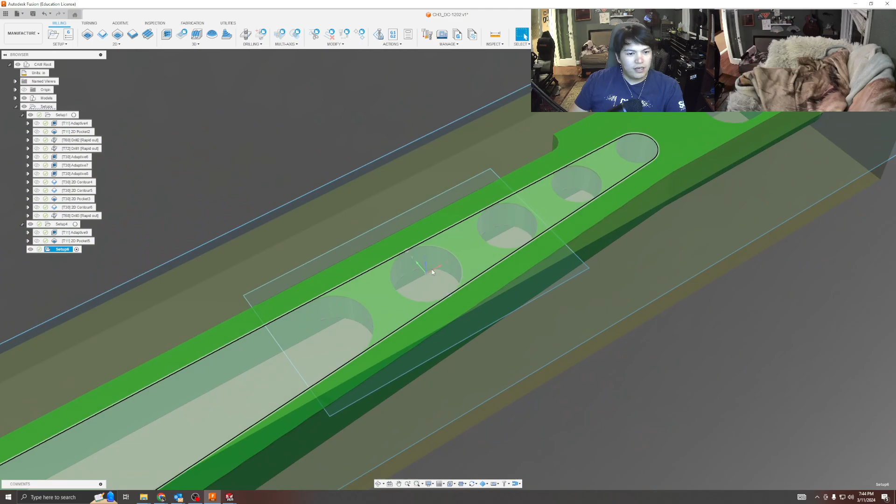Okay, I'm going to finish this part up in its entirety, and then I'll come back and review it. Oh, sorry, I forgot to mention. The whole purpose of that was so that I can get this origin off of it. Oh, I did mention that, but here's the setup anyways. Yeah.

Okay, so this part is finished in terms of CAM. I still need to go and do feeds and speeds. But first we're going to go through and do soft jaws. That'll be the segment after this, but let's go through the second setup. Nothing you haven't seen before. Now that we have an origin on our actual part itself, we know it's going to be pretty accurate. Go through adaptive clears, pockets.

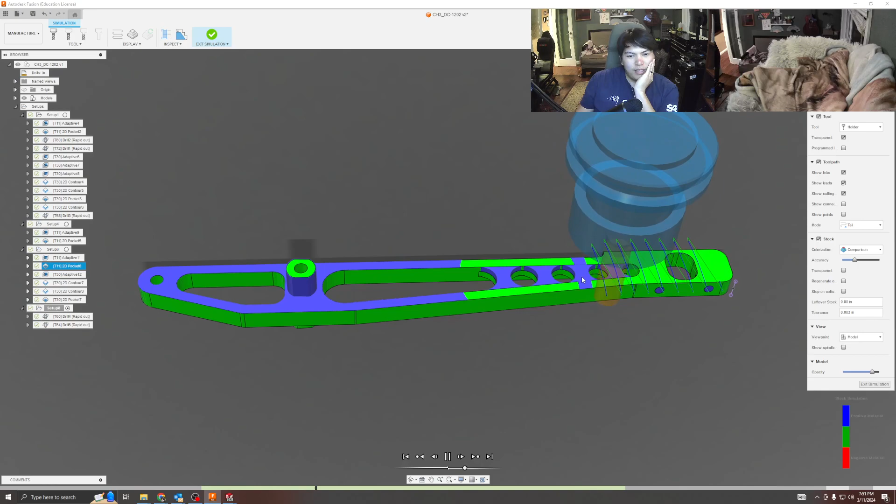If you've got a keen eye, you'll remember that the pocket toolpath on this was left to right as opposed to the up and down it's doing now. So that'll be funny to see what it turns out to look like. So just the pocket to do the axial finishing pass. Remember, we can do axial finishing passes with the roughing end mill. Keep going. Boom. And now we're going back to the 1/4 inch. I did do a machining boundary here on the adaptive. Not really needed, to be honest, but I had the sketch there anyways. So machining boundary, clear out all that material.

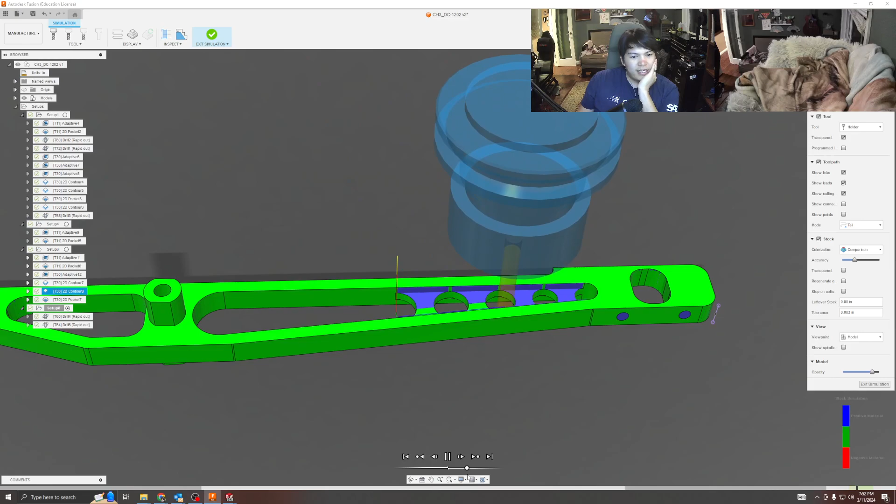Keep going. Again, I grouped my tools together, so we have tool 11 and tool 30 all grouped together. Go through, do our finishing passes, do this contour, and since it leaves a little material, just do a tiny little pocket, just a boop, and it goes through and does some air cutting. Cool. Alrighty, so that part's done.

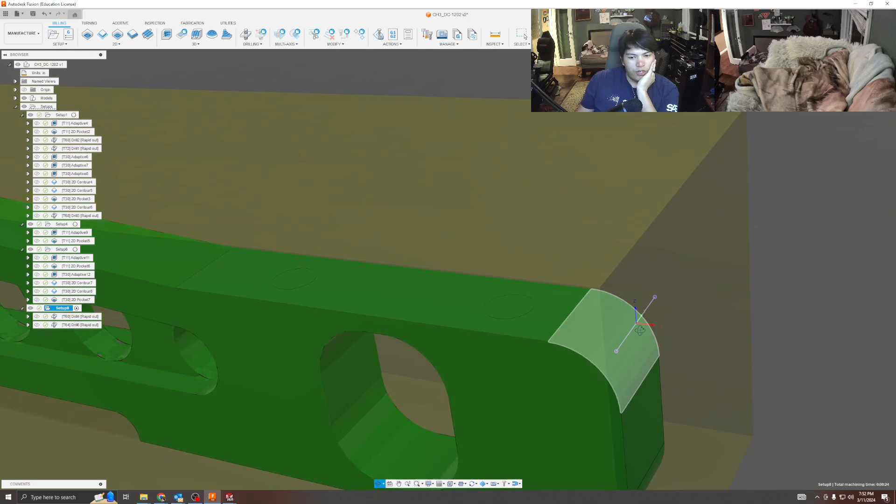And now for our final operation, we're going to go to our setup. You'll see here that I actually origined off of this part right here. I just did a sketch on this face and lined it up with that. I just did a center point.

You might be asking, why am I drilling from this side instead of this side? If you look on this side, we have a beautiful flat surface that we can rest on the parallels. So that way, we're not getting any weird tipping. We're not getting as much chatter, because in this setup, parallels would be resting. We'd probably push the parallels as far as we can to the right until it engages that fillet. And then this would kind of be hanging in dead space.

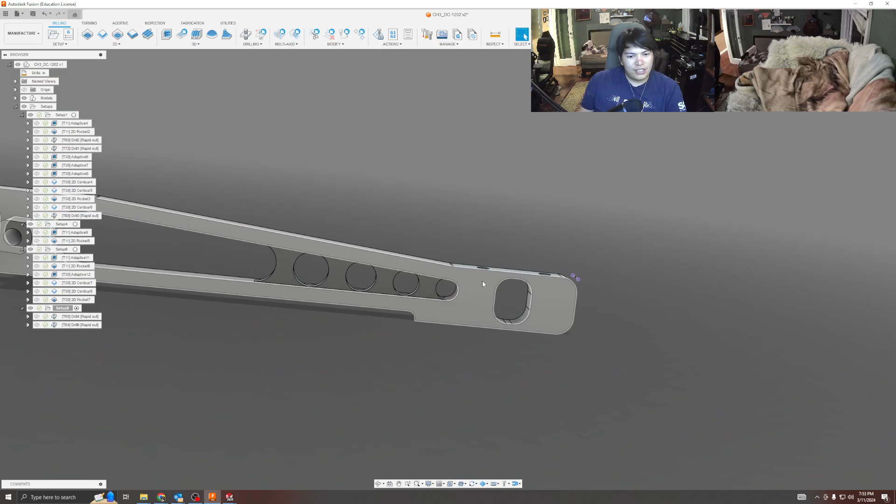But what we can actually do, in order to reduce the amount of chatter, is pull the parallels a little bit back. If it's a 6-inch vise, they'll hang out of the vise a little bit. So that way we get the vise around this face right here to really ensure that we have the least amount of chatter as possible. Chatter with drilling is not good. You can vibrate that puppy and it'll just snap the drill bit right off, especially if it's carbide.

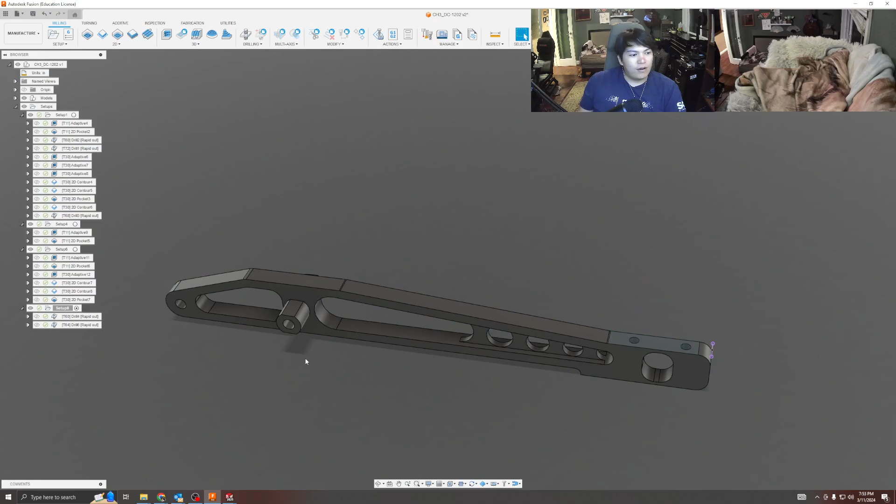I recommend tool steel drill bits just because they're way more ductile, less brittle. Carbide is really good in terms of retaining tolerances through manufacturing tons and tons. You're drilling 1,000 holes with that thing, and the tolerance is really solid. We don't drill that many holes. Our tolerances are fine for our holes.

And the last thing I wanted to point out is for the actual spot drilling itself. You'll notice that it just plucks a little tip, and we do that by controlling the heights tab. And that is it for this. So that is a general overview on operations, and kind of the tool table. Just to cover everything, a summary. You guys saw the setups already in the previous video. Hopefully you haven't forgotten everything from that.

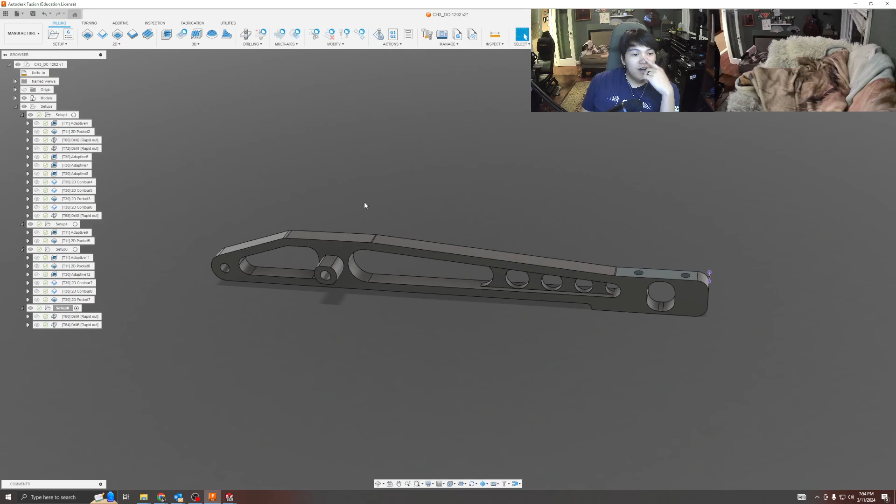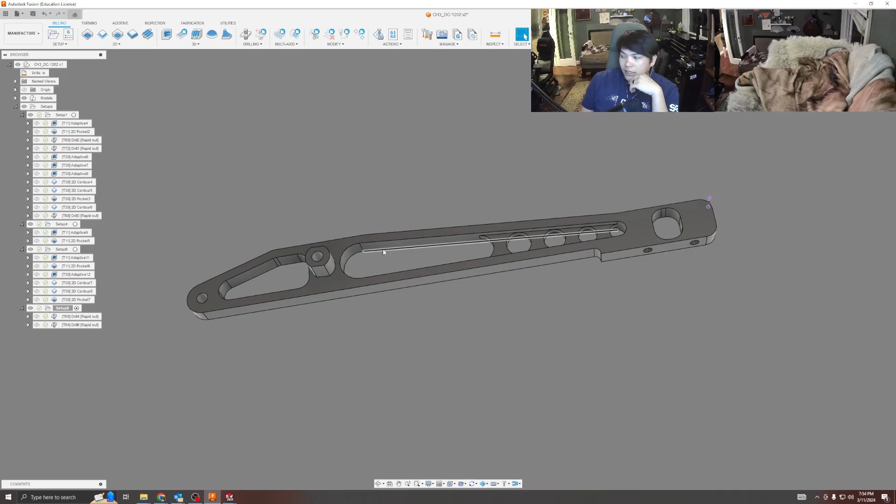For large clearing operations, we use adaptives. That way we can control optimal load, and I'll be hitting on all the optimal load stuff again when we hit feeds and speeds. For axial finishing passes, we use pockets. That's going to be under the 2D section. And for radial finishing passes, we're going to be using contours. Sketches are super important in terms of retaining your machining boundary, ensuring that your tool is going where you want. You constantly use those sketches.

This is a pretty simple part. It's not crazy. It had a lot of little stuff. I wish there was an axial fillet somewhere that we could hit, so that way I can show you guys what's happening. But you'll figure it out. Like I said, ask somebody who's more experienced. A total of seven sketches, because we're missing a sketch 5 here.

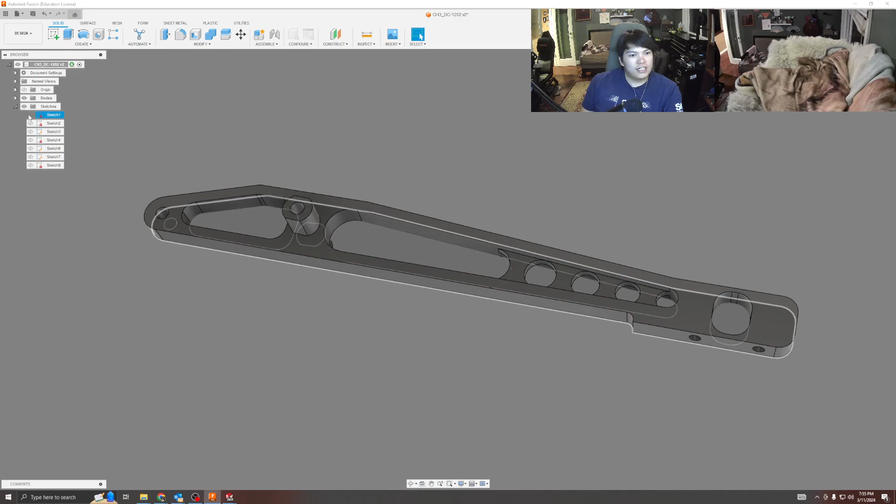Let's just go through real quickly. So we had a sketch there. That was for a contour, because it was mowing down this entire section. Next sketch: another contour here, as well as a machining boundary for our adaptive. This sketch here, that was for a 2D adaptive because I drilled it out. No. What was that sketch for? I don't remember. And then this sketch right here for the actual origin, so we can make sure we're getting an accurate tolerance on this little peg here. We don't want to origin off the stock on the second operation.

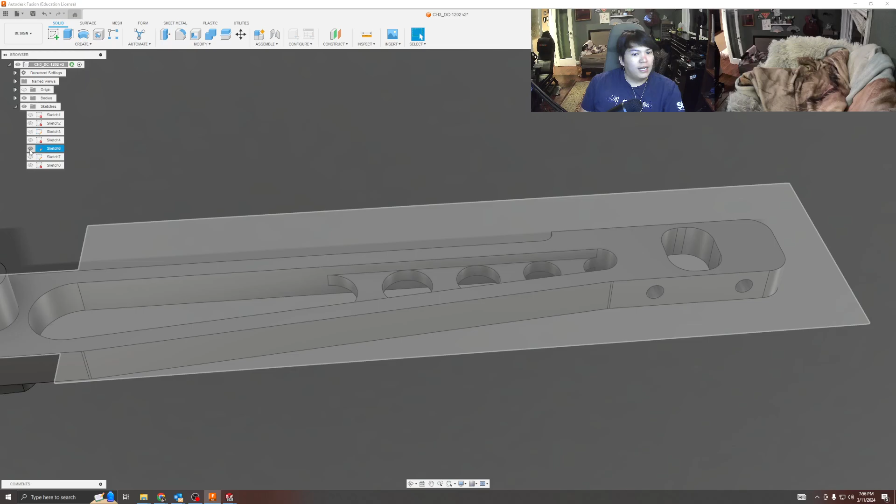Super important. This sketch, a machining boundary for the adaptive to expose that origin, and then a pocket to expose the axial surface on that guy. And then this last one, just so I can select that for my origin.

This is definitely going to be the longest video in the series. Sorry it took so long. Watch it at 2 times speed; it'll still probably be on YouTube, so you have that capability. There's a lot of important lessons in here. If you sat around and watched the whole thing, congratulations. Hopefully you've picked up a few little niche tips here and there.

But that is it. The next section will be soft jaws. Hopefully that'll only be like a 10 to 15 minute video. Feeds and speeds will be really fast too, probably a 5-minute video. And then post-processing, that'll probably be like 2 minutes. So if you finish this, you're almost at the end.